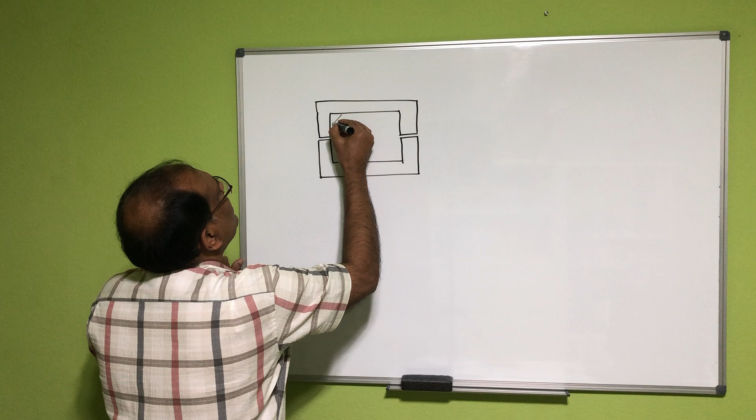That's the direct shear test box. Sometimes it's a square or cubical shape, and sometimes it's also cylindrical shape, so you have to look at what kind of shear box you're dealing with when solving the problem. We usually fill the box with soil. Now we keep either the top or bottom fixed, and then try to pull that one with a force S.

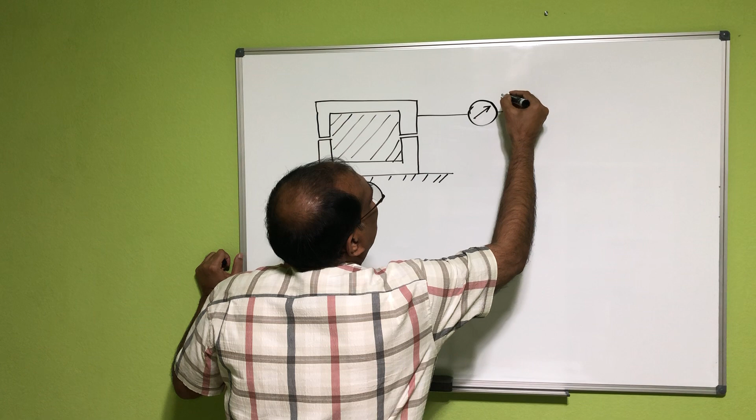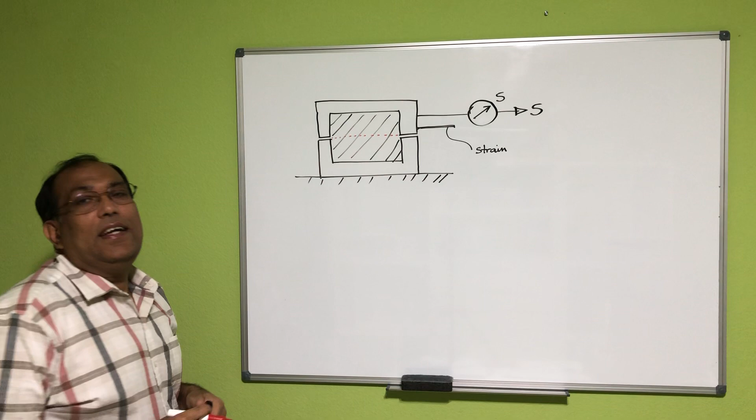When we apply that force, we can either increase the stress, or sometimes apply constant strain and measure what stress results from that strain. We have a box from which we can find the shear force, and there is an LVDT that measures the strain. When the box tries to slide, there has to be a crack so the top part can slide, creating shear failure within the material. That's basically your shear strength.

Before that, I forgot to mention you have to add some normal force here. Let's say this is sigma. Sometimes we call the load P, and if the area of the box is A, then sigma is P divided by A. As you push harder, it becomes more difficult to pull on this side, right? You already did this for your lab.

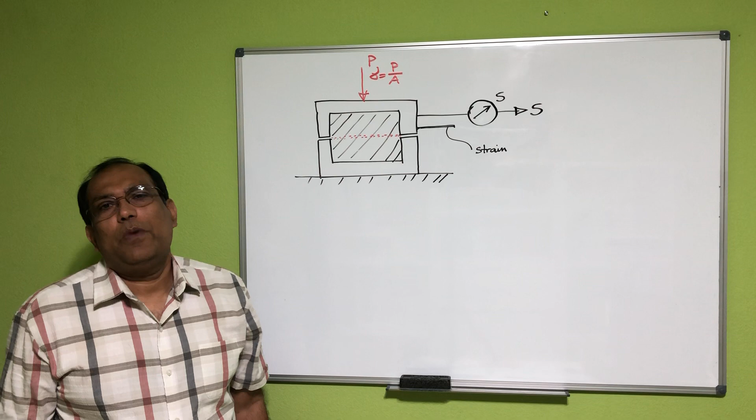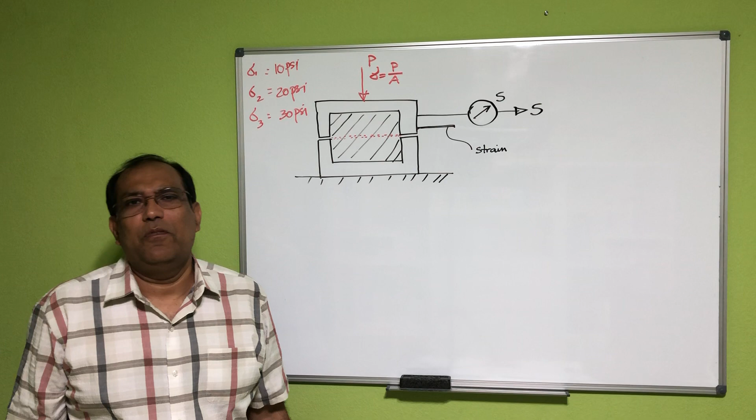Now let's see some problems. For this test we usually change sigma 1, sigma 2, and sigma 3. Let's say 10 psi for sigma 1, 20 psi for sigma 2, and 30 psi for sigma 3. For each normal stress we try to find the stress-strain diagram. If you draw the curve with strain and stress axes, you'll see curves for sigma 1, sigma 2, and sigma 3.

This is for sigma 1, this for sigma 2, and this for sigma 3. For each case we have to see what is the maximum stress the soil can take - that's the strength of the soil. So let's say this is tau 1, this is tau 2, and this is tau 3.

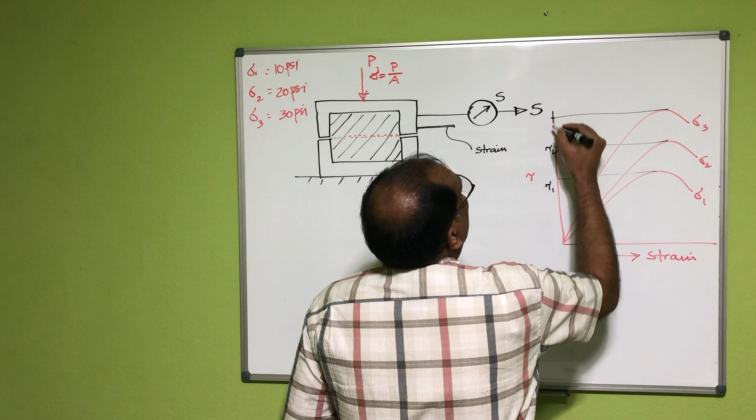Then we draw another curve, with sigma on one axis and tau on the other. If you plot the three points - sigma 1, and so on for all three points - for most cases, like sand and normally consolidated clay, C is usually 0, meaning the curve passes through the origin. Now this angle we call phi, the internal friction angle for the soil.

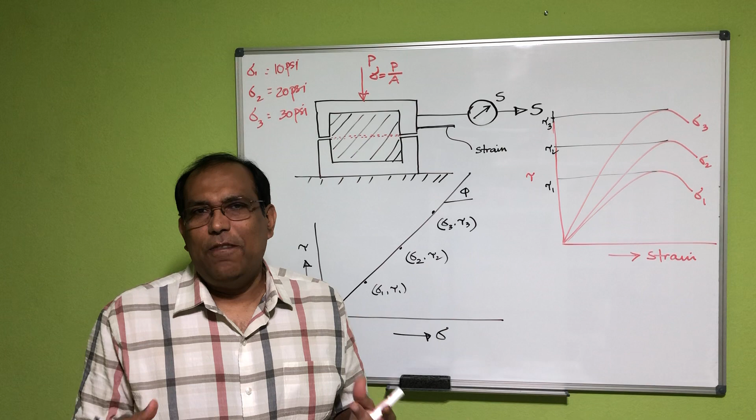That's what we can determine from our direct shear test. The problem with the direct shear test is we cannot mimic the side pressure or confining pressure, and also we cannot mimic the drainage situation, whether the soil drains fast or slow. There's no mechanism for that. That's why we also do the Tri-Axial test. The problem with the Tri-Axial test is it's a little more complicated - very accurate, but more complicated and takes more time than the direct shear test.

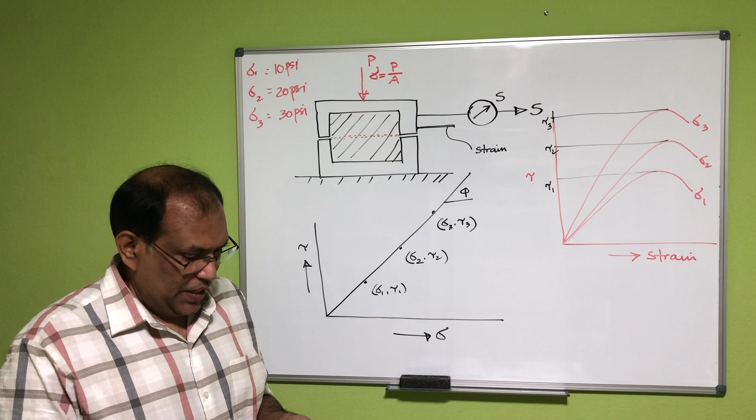Anyway, I'll talk about the Tri-Axial test later on, but let's do some problems from the direct shear test here. If you take a look at your worksheet, we can do some problems from there.

So let's start from number 2. Actually, number 1 is a tri-axial test problem, so we'll solve that one later on. Let's start with direct shear test problem number 2.

A direct shear test was conducted on a dry sand specimen. As soon as they say it's sand or normally consolidated soil, this means your C is 0, okay? This is kind of implied there. They will not tell you that C is 0, but as soon as they say this is sand or normally consolidated clay, they are indirectly telling you that the cohesion C is 0.

The shear stress at failure was measured 20 psi when the applied normal stress is 30 psi. The angle of internal friction of the sand would be easy to find, since you already know the relationship that tau is equal to sigma tan phi plus C. But this is dry sand, so your C equal to 0.

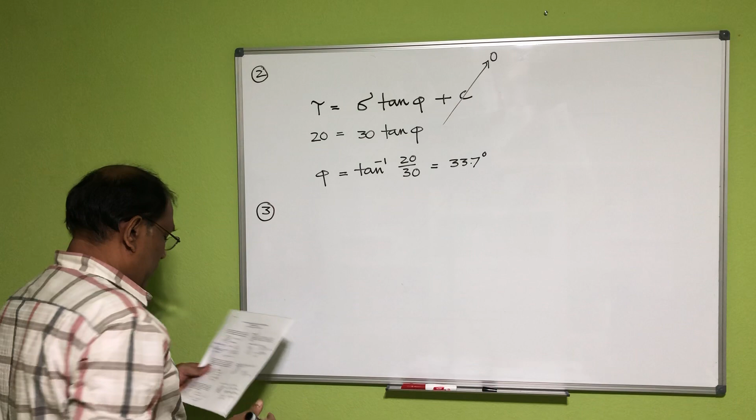This is problem number 2. Problem number 3: the direct shear test was conducted on a 2 by 2 by 1.2 inch height specimen, dry sand specimen. Again, when it's saying dry sand, it means your C equal to 0.

If the angle of friction of the sand is 24 degrees, the estimated shear force required to failure when the applied normal stress is 16 psi—so actually your C equal to 0 and sigma equal to 16.

So first of all, you just find out your tau here. Tau is equal to sigma tan phi, and phi is 24 degrees. So this one is 16 tan 24 degrees, which is basically 7.124 psi.

Now you have to multiply with the area if you want to find out the shear force, right? So shear force here is equal to tau multiplied by the area—the area of contact between these two surfaces, which is actually 2 into 2, 4 square inch.

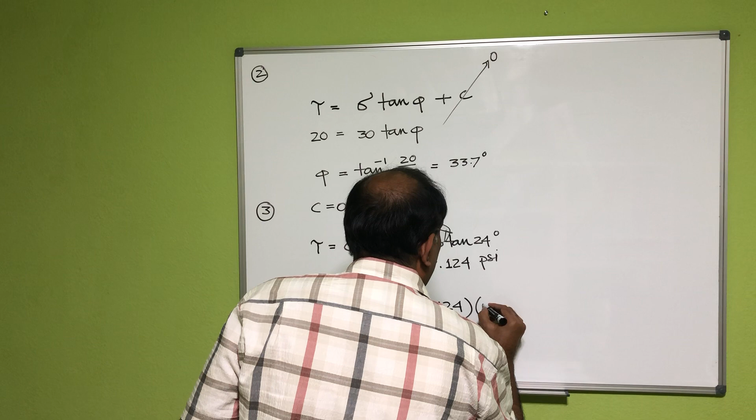So this one would be 7.124 multiplied by 2 into 2, that's 28.5 pounds. Okay, so the answer is C here.

And also, if you take a look in your class notes, you will see there are a couple of examples from the direct shear test there. Take a look there, this one is very, very important too. Anyway, now we are done with the direct shear test.

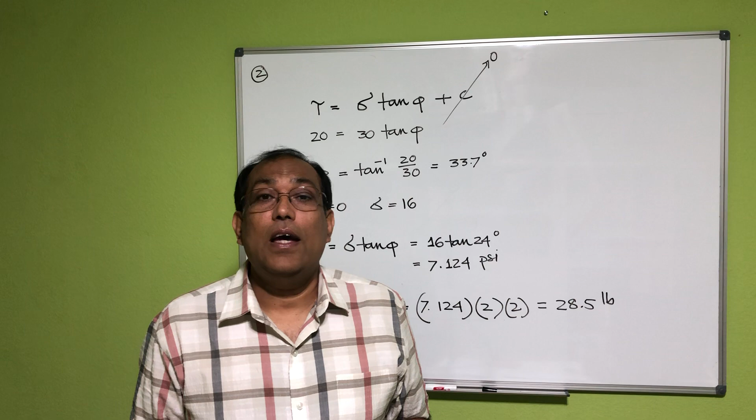We'll be talking about the tri-axial test. Now, we don't have any lab for tri-axial test for undergraduate students. Usually we have a lab for tri-axial test for advanced soil mechanics class, which is a graduate class. But I'll talk about this tri-axial test a little bit so that you can understand what it is and what it means.

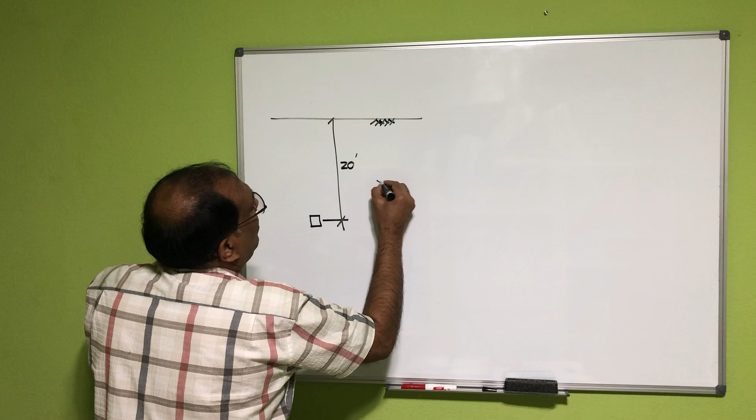Let's say this is your original grade here, and I'm taking a soil specimen from somewhere here, which is 20 feet below the soil surface, okay? And the gamma of that soil is 110 pounds per cubic foot.

Now if you see in this soil element, what is the vertical stress here? That would be sigma vertical, which is gamma H, which is 110 into 20 PSF.

Now, what is the horizontal pressure here? You can remember from your fluid mechanics that for any kind of fluid, the horizontal force is equal to the vertical force, because for liquid, the pressure works similarly in every direction. For soil, it's not true, okay? But what's the horizontal pressure here? That's basically not covered in this course, it will be covered in the next course.

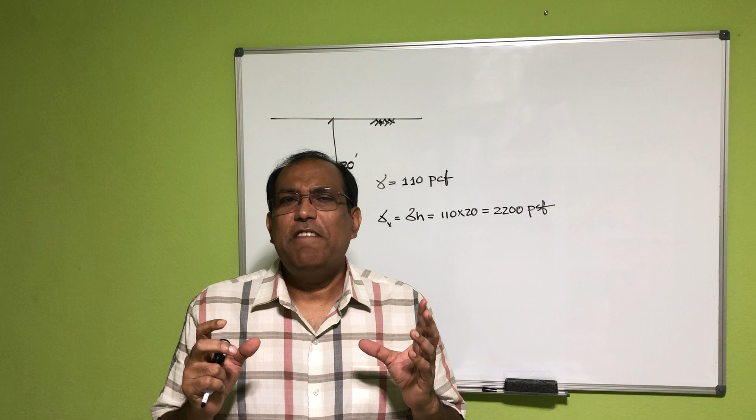But usually if the phi of the soil is 30 degrees, then your horizontal pressure is half of your vertical stress. So if I take that soil element here, you can see this is 2.2 KSF, and let's say this is 1.1 KSF—so that's the loading situation of the soil element.

Now you can see here that at the beginning we don't apply any shear force at the top or side wall of the soil.

Here you can see there is no shear force here, because these are principal planes, and on principal planes your shear should be 0. But when we apply that vertical force, it will create shear force at different angles. If you check the shear force there, you'll see it's not 0 in that particular plane. So it creates shear force automatically at different angles, and if this shear force is higher than the shear strength of the soil, the soil will slide at that particular angle.

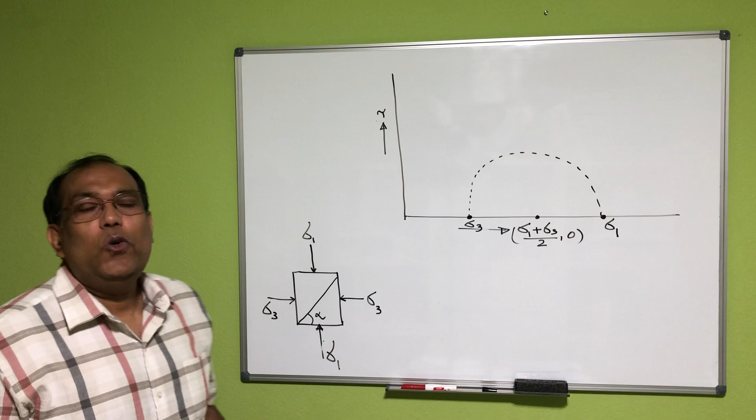Now let's say this is a sand, so the cohesion is 0. If you draw the Mohr circle here, this is your sigma 1 and this is your sigma 3. That's the Mohr circle. Now you can see, from Mohr-Coulomb's theory, that the soil will fail at a particular combination of normal stress and shear stress, and the failure envelope looks like this line: tau equals sigma tan phi plus c, but c here is 0, so I'm just putting that in.

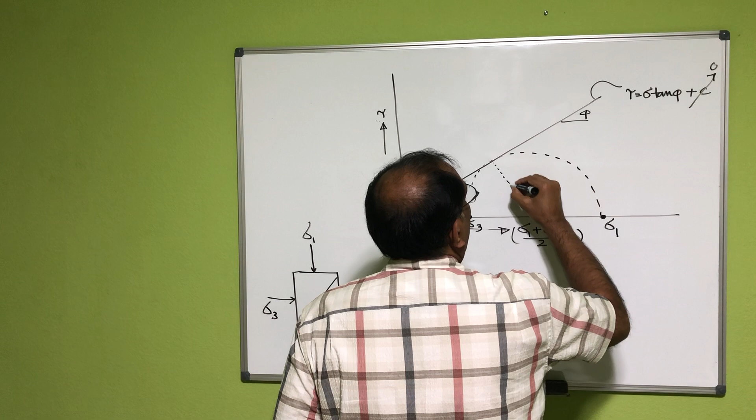Now if you look at your book, this figure comes from there, and from that figure they have 2-3 different relationships or formulas that you might have to use to solve these problems. That's the failure point here, which we usually call sigma f, tau f. Now the important thing is: what is that angle making with the positive x-axis?

If you know that theta, you can find out what the shear stress and normal stress would be on that failure plane, because you already did this in chapter 10, the stress transformation cases. Now let's say this one is twice theta, and this one is 90 degrees. Let's say this is alpha and this is phi. So you can see this is 180 degrees, so I can say 2 theta plus alpha equals 180 degrees, which equals alpha plus 90 plus phi.

So in this equation, alpha cancels, so your theta would be 45 plus phi by 2. So this angle here, theta, is equal to 45 plus phi by 2.

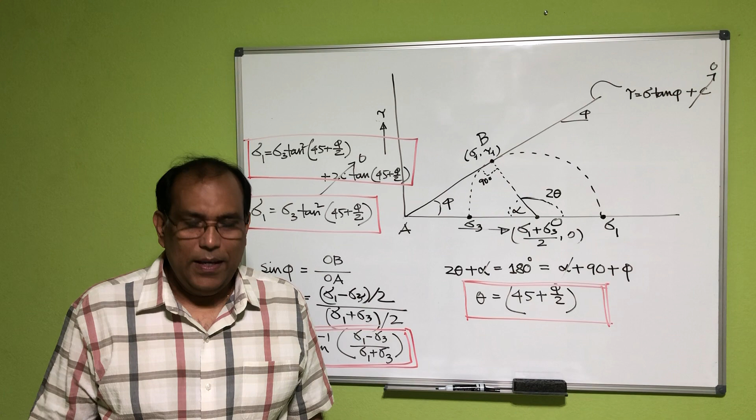Now let's talk about, hey, why we are doing so many different Tri-Axial tests, right? CD test, CU test, and UU test. Why? What does it mean actually, right? Now let me show that one to you a little bit.

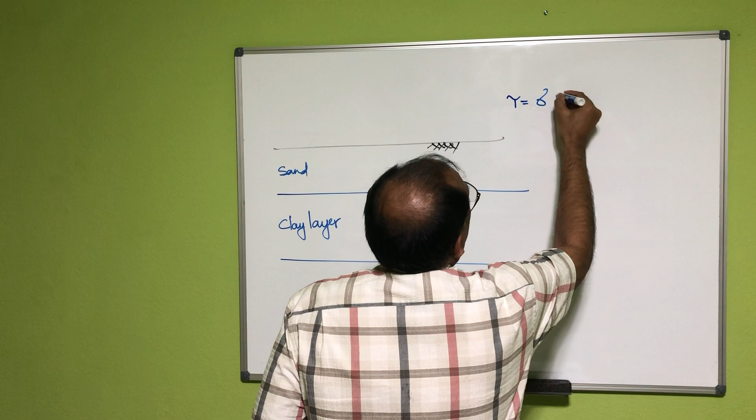Let's say this is sand and this is a clay layer. Now I'm just trying to find out, hey, what would be the tau here in the middle of that layer. But you see that your shear strength for a c-phi soil, meaning either sandy or a mixture of sand and clay, is a function, right? It's not a number, it's a function. And this function is your tau is equal to sigma tan phi plus C, okay?

Now, let's say for this particular layer, not clay layer, let's say it's kind of like a mixture of sand and clay, yeah, we can just say low plasticity clay. Now if you want to find out the tau, you have to say, hey, what is your sigma here, right? But before sigma, this is your sigma basically here, I'm gonna make a structure here.

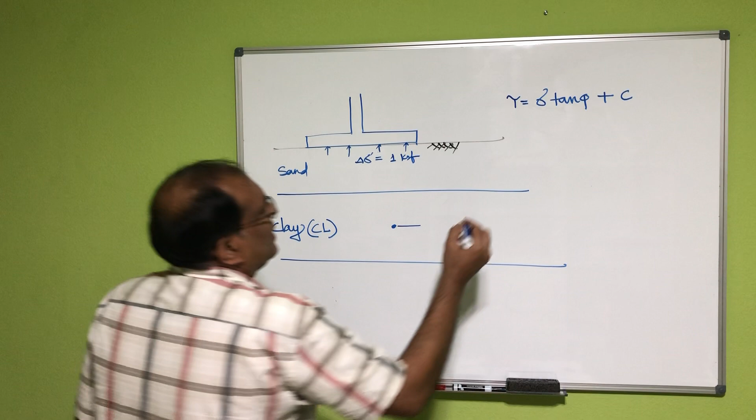That's actually from there. This one, let's say, is del sigma prime, which is, let's say, 1 KSF. Okay, and let's say this one is 10 feet, this is 16 feet. Here, the soil gamma is let's say 120 PCF, phi equal to 34 degree, and here you have your water level here, and let's say the gamma sat here equal to 115. And C is equal to 200 PSF.

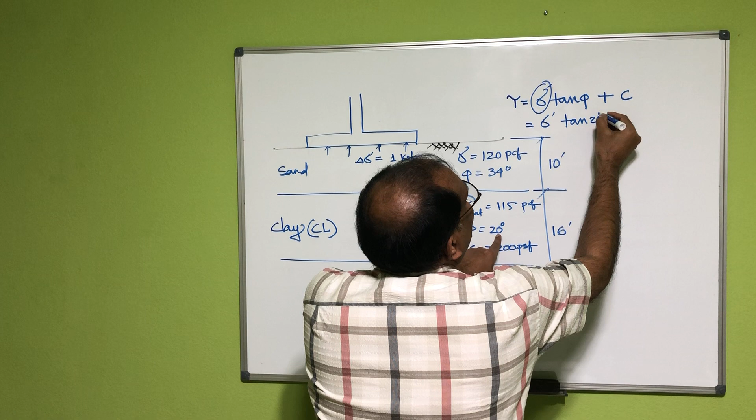Okay, now what would be the strength of that soil at point C? Now it's not that difficult here. You can just plug all those values here. Only important thing is here, this one is basically the effective stress. All other stresses remain, all other things are fixed here, because you can see this is sigma prime, tan 20 degrees plus actually 0.2.

Now, what is your effective stress at this point? You can see that the overburden pressure here is 120 into 10 plus 115 minus 62.4 into 8. 8 is the midpoint, that's why I'm just keeping that one. That's your overburden pressure. And then you can see that this much force is coming from the new force, from the new structure.

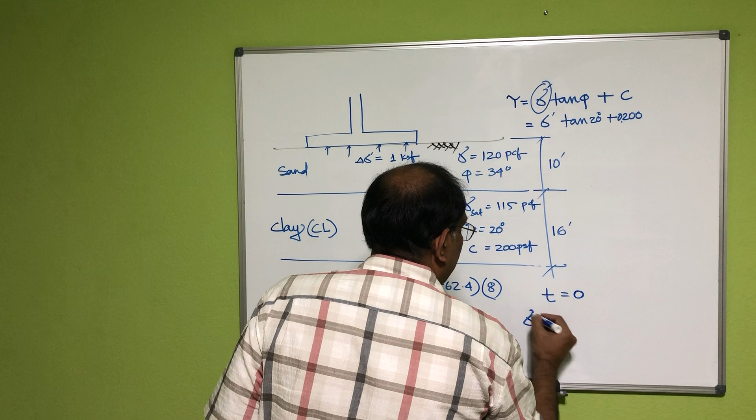Now what will happen, as soon as you apply that load, who will take all this load in this layer? Because this is clay soil, it has to go through primary consolidation settlement. So at the beginning, you will see that all the load is taken by the water, right? So at time t equal to 0, you see your sigma prime would be actually this overburden pressure, and at the beginning del sigma, this one is actually 0, right? Now you can see when the consolidation occurs, then basically this one would be sigma prime plus.

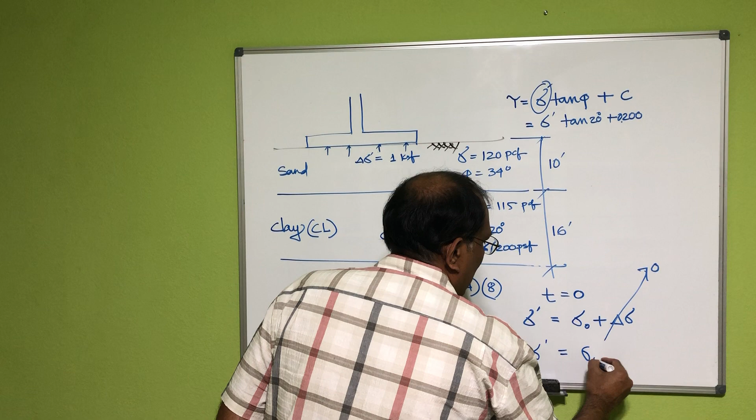So you see that basically your effective stress is changing with time, and this time is a function of what kind of soil we are talking about. This is applicable only for clay soil, because for sandy soil the water will drain very quickly. You can calculate this based on this equation here.

But let's say this soil takes 15 years for full consolidation. I'm making that structure in 2 years. So by the end of construction, 2 years, you will see only 5 to 10% consolidation occurred, meaning only 5 to 10% of the total load applied is going to the effective stress.

So if your effective stress is low, your shear strength is low. If your effective stress is high, your shear strength is high. So basically with time your shear strength is changing. That's why drainage is very, very important, how fast this one is draining.

Based on that, we try the Tri-Axial test with 3 different scenarios. First, the soil is draining fast enough that if the structure takes 3 years construction, by that time the overall consolidation settlement will have occurred. That's case 1, we call that CD test, consolidated drained, meaning all the time the pore water pressure will be 0 because construction is slow enough that water can drain out easily.

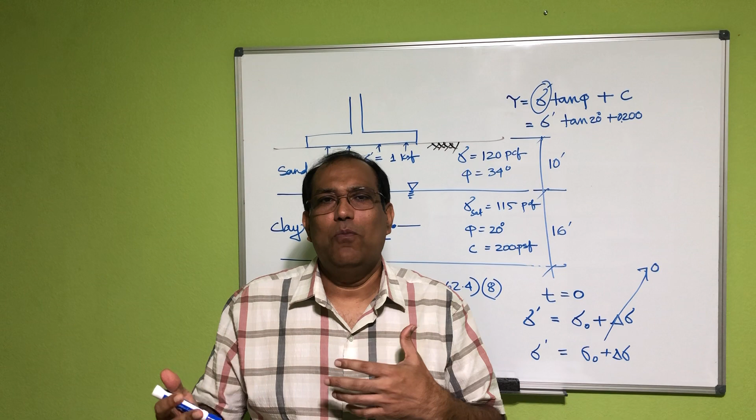We usually apply confining pressure, then allow the water to get out, and when we apply the vertical or shear force, we close the valve so water cannot drain at that time. Based on that you get 3 different Mohr circles, because for completely undrained situation every pressure you apply is taken by the water since water is not draining. So you cannot change the effective stress on the soil, and your strength remains the same.

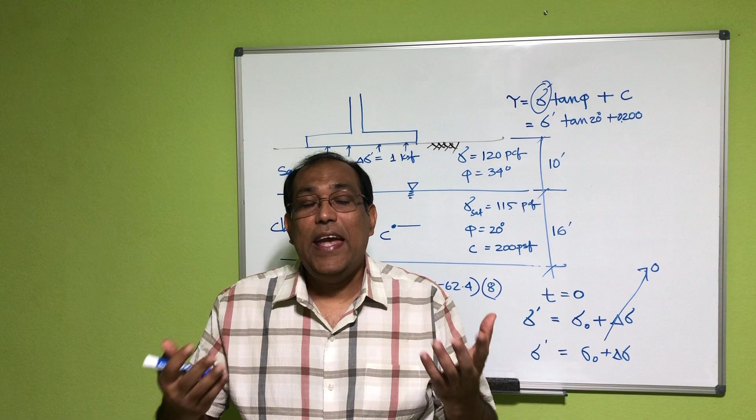So let's now go back. We'll talk about each of the problems and try to see how this plays out. Let's start from number 1 here.

Problem number 1 says for a normally consolidated clay or sand, it means your C equal to 0. And then they're saying phi is equal to 26 degrees, phi prime.

In a CD test, the specimen failed at a deviator stress of 23 psi. Before doing that, let me explain a little bit about what deviator stress is and what all these stresses are. For your Tri-Axial test, let's say this is your soil specimen, cylindrical. Usually we always take a cylindrical soil specimen.

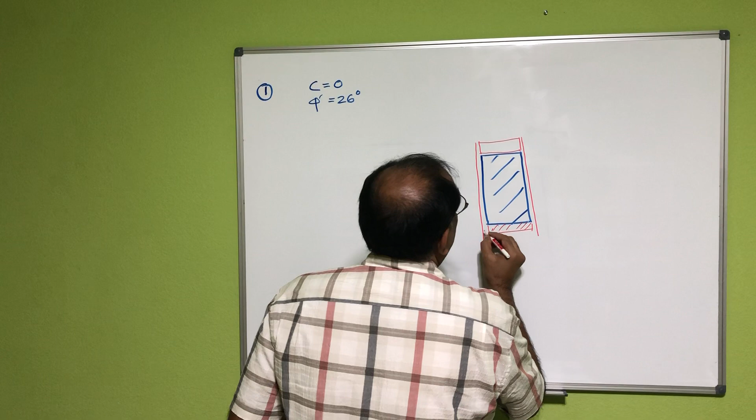That's a porous stone here. And then we keep the whole thing inside a tube, a rubber membrane, and lock it here and here with O-rings, so they are inside the membrane. Now the whole thing we put inside a water chamber.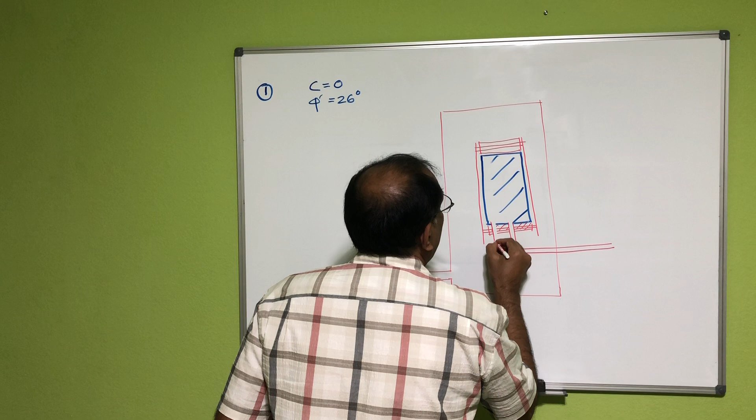Now from here you have two lines: one just to drain the soil from there, and one more line which measures the pore water pressure. Now first, what we do is just fill that chamber with water.

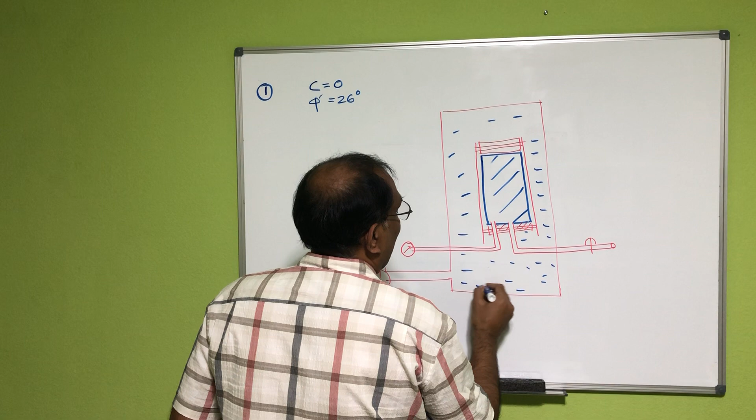Now let's say this is closed, the valve is closed, so no drain. Now let's say I'm changing my pressure here from a control board, I have a knob there, I can change it, let's say I want to apply 10 psi load. So the water pressure, sigma 3, let's say 10 psi.

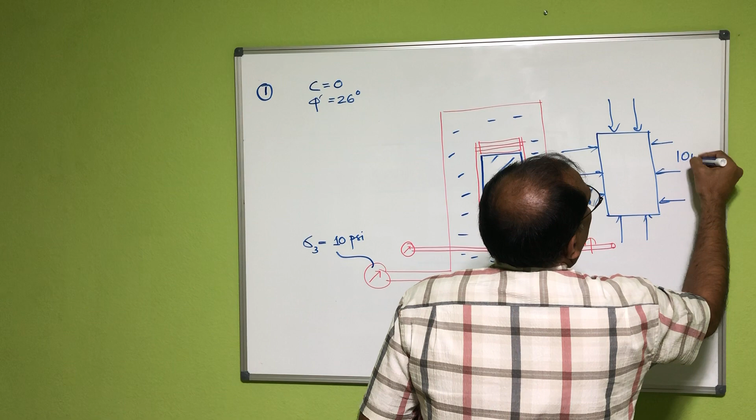So you can see the whole thing here will be under 10 psi pressure. If I show that one here, every way I have 10 psi pressure. So what happens when we apply that? It tries to compress the soil from every side, the soil will try to consolidate.

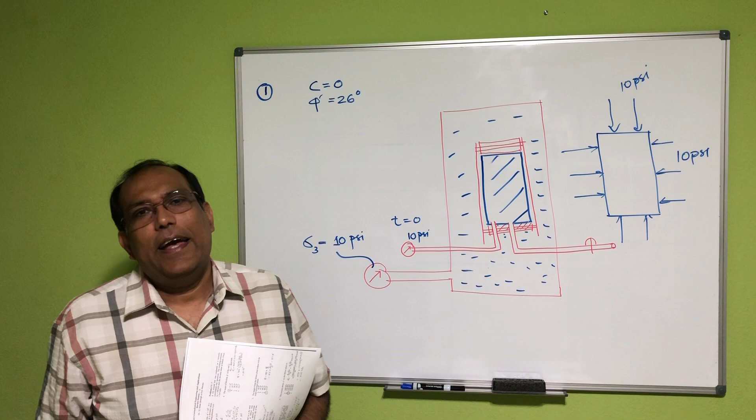Some of the water inside the clay soil will try to get out. So here you can measure, if I apply 10 psi at the beginning, the pore water pressure would be 10 psi at time t equal to 0. Then you open that valve, the water will try to get out, and this pressure will go down, down, down. At a certain time, this excess pore water pressure will be 0, meaning the soil has already consolidated. As soon as consolidation occurs, then we apply the vertical load here, very slowly.

And let's say this one we call the deviator stress. When this one fails, we measure that one. We call that one deviator stress at failure.

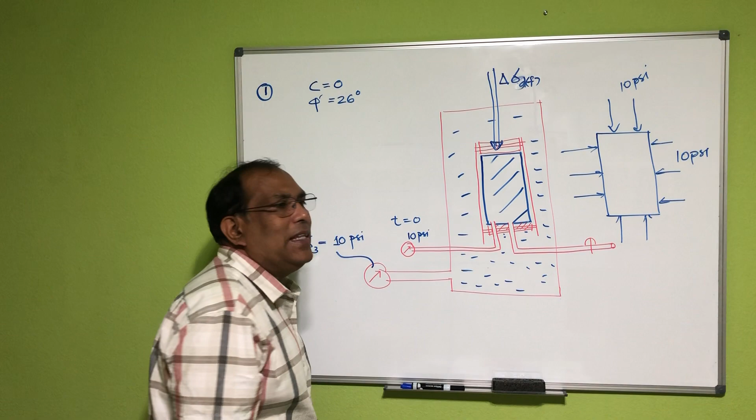Now there are two situations. First, when you are applying that confining stress, this one is open. If this is open, and when you are applying that shear, this one is also open, meaning the drainage is occurring all the time, then we call that one CD test - Consolidated Drained test. You are allowing consolidation, and then you are also allowing drainage when you apply that shear.

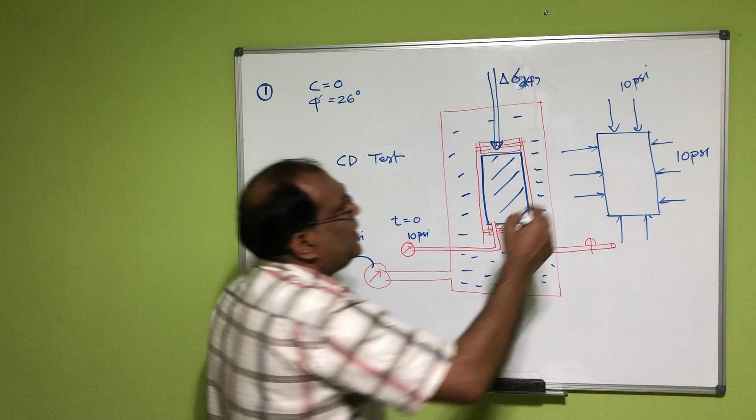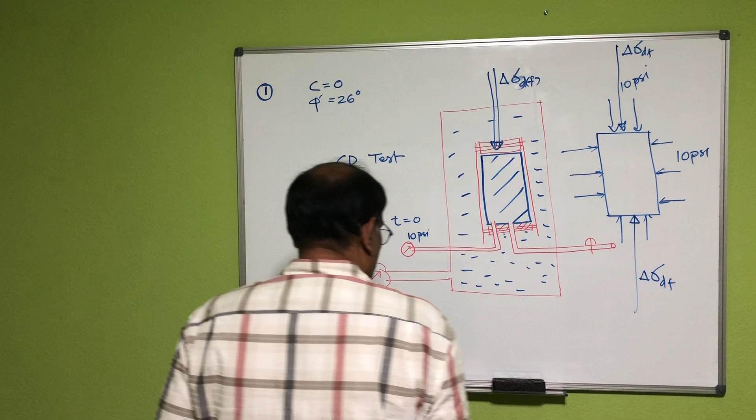Now if you see here, when you are applying this one, you are applying additional force. This is your deviator stress. So if I draw that one here again, this one is your sigma 3, all around pressure, and this one is your sigma 1, which is basically sigma 3 plus your deviator stress. So deviator stress, delta sigma df, that's basically sigma 1 minus sigma 3. That's your deviator stress.

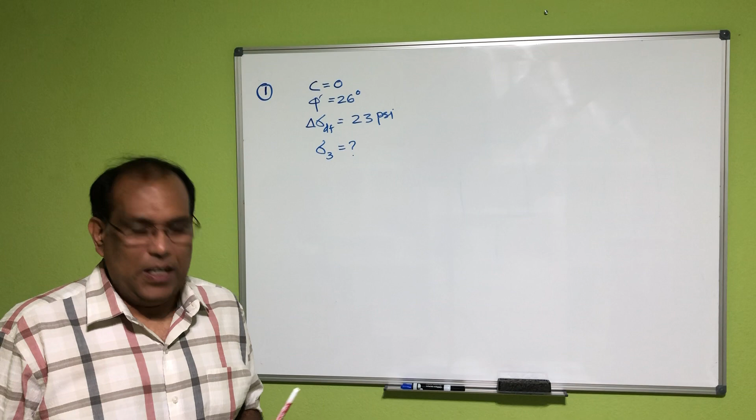Now let's go back to this problem here. This one is saying that the specimen failed at a deviator stress of 23 psi. They are asking what is the confining pressure, sigma 3. Sometimes we also call that one all around pressure, confining stress, confining pressure, or all around stress.

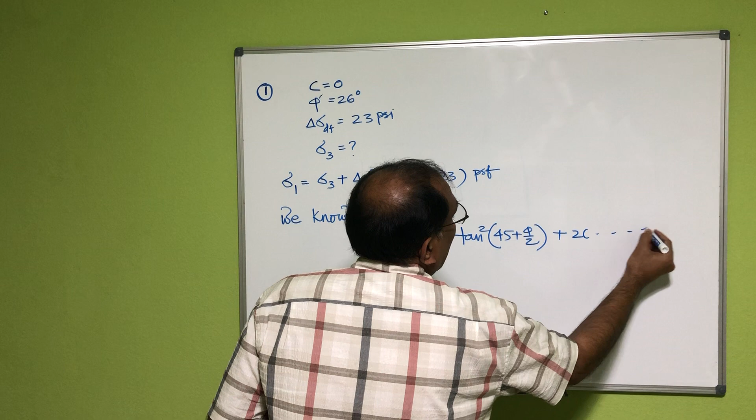Now you can see here, your sigma 1 is basically sigma 3 plus deviator stress. We know sigma 1 is equal to sigma 3 tan square of 45 plus phi by 2, plus 2C, but this one is 0, so I'm not writing that one here. So you can just say sigma 3 plus 23 is equal to sigma 3 tan square 45 plus phi by 2. If you solve that one, you get your sigma 3 is equal to 14.7 psi.

Now let's move forward. This is actually problem number 1. Problem number 4 to 7 are actually the same thing here, so I'll just say 4 to 7.

This one is saying that a CD tri-axial test was conducted on a normally consolidated clay specimen. The confining pressure sigma 3 is 300 kPa and the deviator stress at failure is actually 350 kPa. So what's the angle of friction of the soil? So you can see here, first of all, number 4, that's a CD test conducted on a normally consolidated clay specimen. As soon as this one is saying normally consolidated clay, this means your C equal to 0, right?

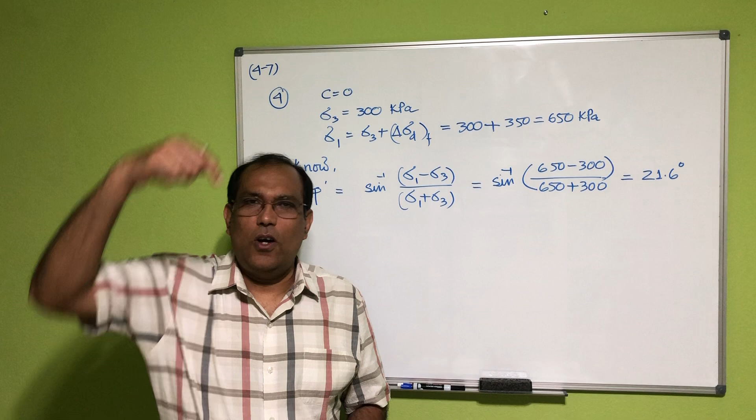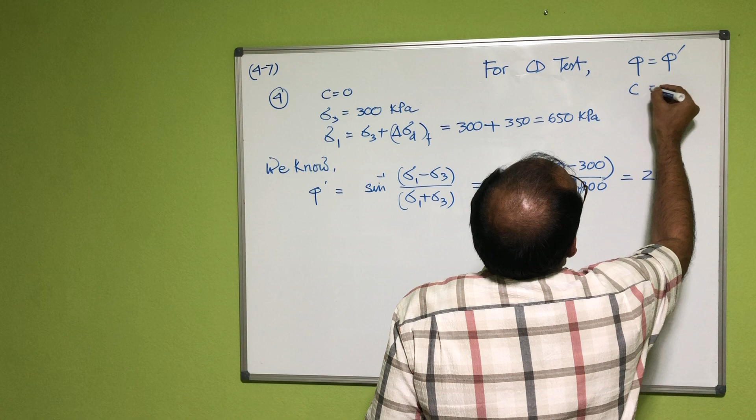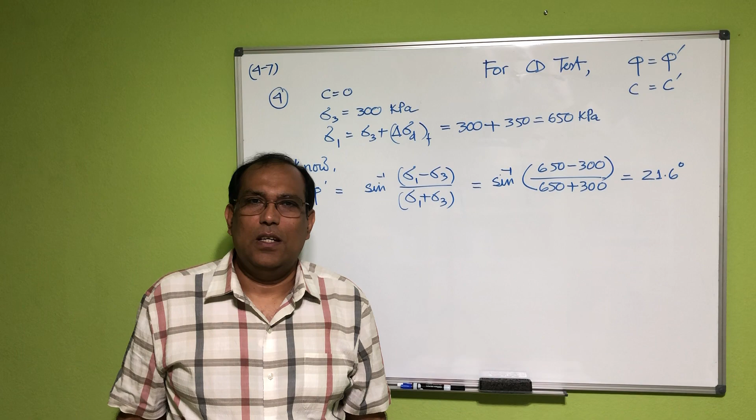One thing to try to remember for CD test, your valve is open all the time, meaning your pore water pressure is always zero. And you have to apply the load, either confining stress or the vertical force, slowly in your CD test so that all the time the pore water pressure will be zero. So for CD test, your phi is actually your phi prime, and because your pore water pressure is zero, effective stress equal to total stress minus pore water pressure. So when pore water pressure is zero, then basically your effective stress is always equal to your total stress. So the strength parameters phi and C would be equal for effective stress and total stress cases.

Now let's move forward. They say the angle that the failure plane makes. So if I draw that one here, so you got your sigma 1 and sigma 3. This one was 300 kPa and this one is 650 kPa. Now this one is actually asking what angle this specimen is going to fail at, right? So that's your angle theta.

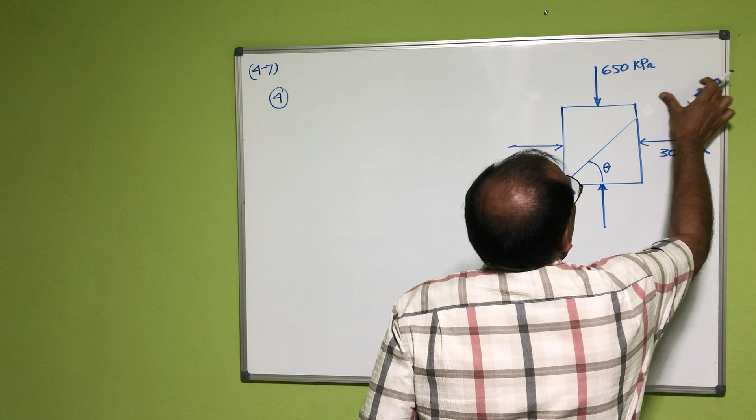But we know, number 5, theta is equal to 45 plus phi by 2. So 45, in the previous problem number 4, we already got the value of phi, which is 21.6. So this one is 55.8 degrees. Now they're also asking, hey, the normal stress sigma on the failure plane in that particular plane. So you just go back to chapter 10 now.

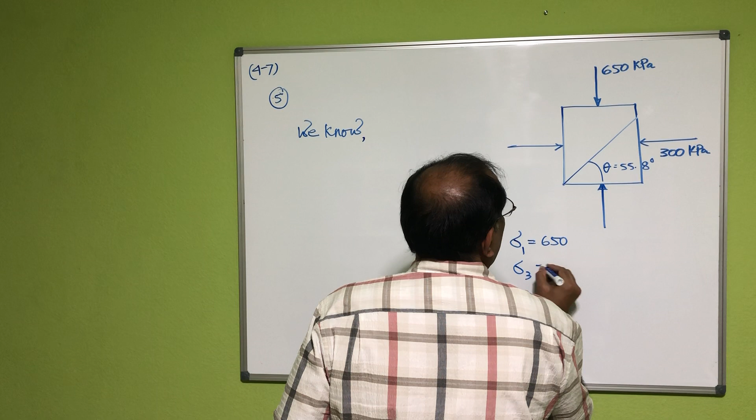So you can see here sigma 1 is basically 650, sigma 3 equal to 300, your angle theta measured, positive x-axis counterclockwise is positive, so this one is 55.8 degrees.

Okay, what else? Tau xy, that's actually 0 because I don't see any tau here, right? So we know from chapter 10 that sigma n at any particular angle is equal to sigma 1 plus sigma 3 divided by 2, plus sigma 1 minus sigma 3 divided by 2, cosine twice theta, plus tau xy sine twice theta, right? But tau xy equal to 0, so I don't need that part here.

So you just plug those values here and find out what would be your sigma n. So 650 plus 300 divided by 2, plus 650 minus 300 divided by 2, cosine 2 into 55.8 degrees. So you got 410 kPa.

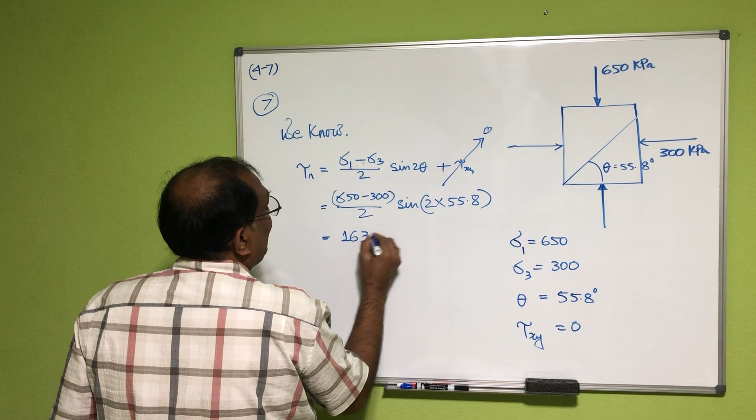Okay, so that's basically the same thing like that I showed at the beginning. Okay, anyway, now let's move forward.

We are going to show 2 problems from CU test. Okay, so let me explain CU test a little bit, so that you can understand that one easily.

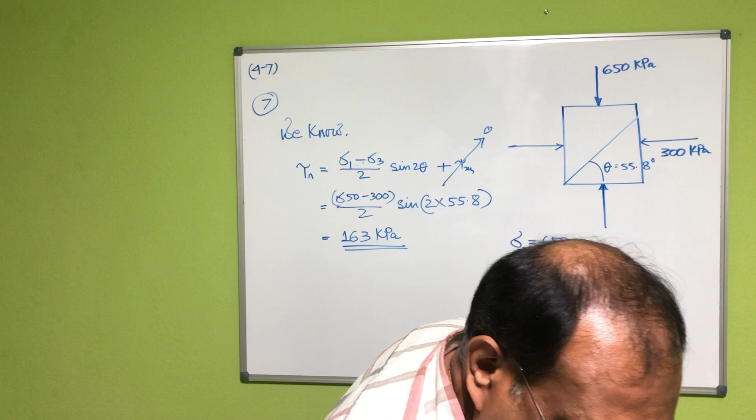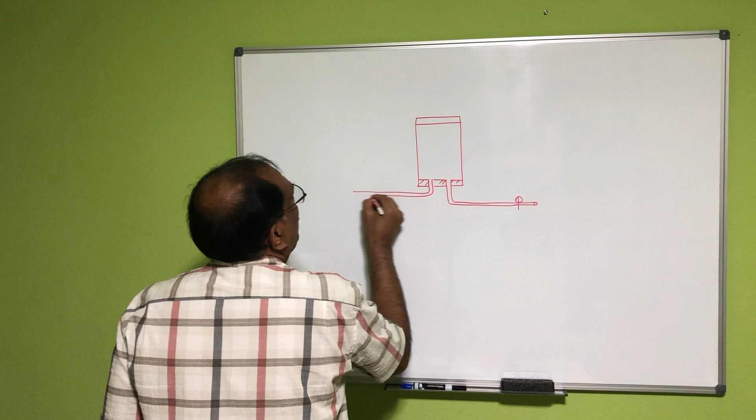So as I showed you earlier, let's say this is my soil specimen here. There is a line here for drainage. If you open that valve, then it will drain. If you close that valve, it can't drain. Okay, so now you can see there is also a transducer that can measure the pore water pressure.

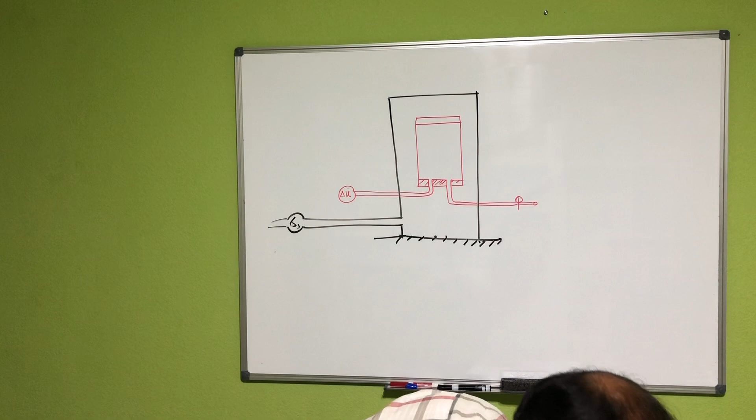Pore water pressure. Now the whole thing is inside a water chamber, right? So here you can just apply water pressure here. Now let's say I apply a confining stress first here.

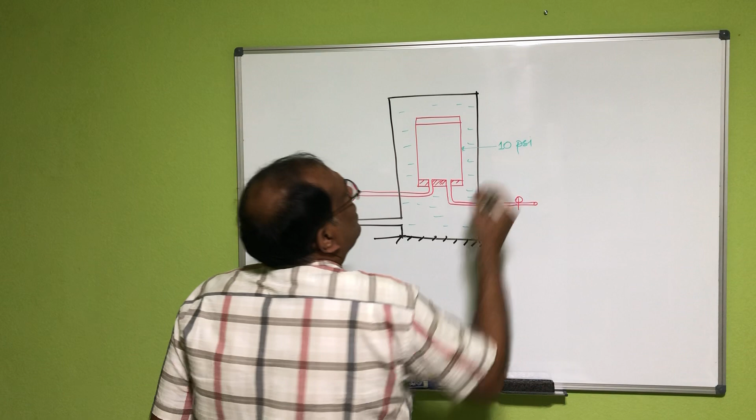Fill that one with water, and all around pressure, let's say here is 10 psi, okay? And once you apply that 10 psi, usually we don't apply 10 psi at a time. We usually apply 1 psi first, and then after 30 minutes or an hour, we'll change that one to 2 psi, so that I'm applying pressure and the soil is trying to shrink because you are trying to push that one all side, right? So some of the water has to drain out from there.

And you will see as soon as I apply 10 psi pressure, this one theoretically should be 10 psi here. But since the valve is open, during that consolidation time, we are applying that pressure so slowly that all the time the pore water pressure will be 0. This means during that time your effective stress is equal to your total stress, okay?

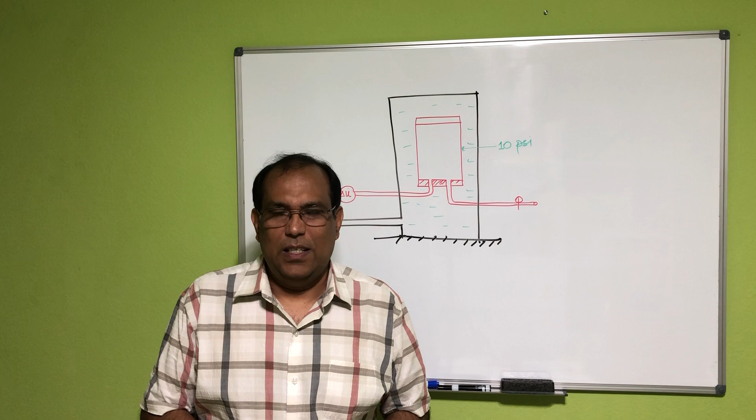Now, what about when I apply that shear? For CD test, this valve will be open when I apply that shear force here, okay, from outside, very slowly. So this one is your deviator stress, right? Sigma dF, that's actually P by A. P is the force, A is the area of that cylinder, okay? Now when you start applying this one, that time actually you close that valve, okay?

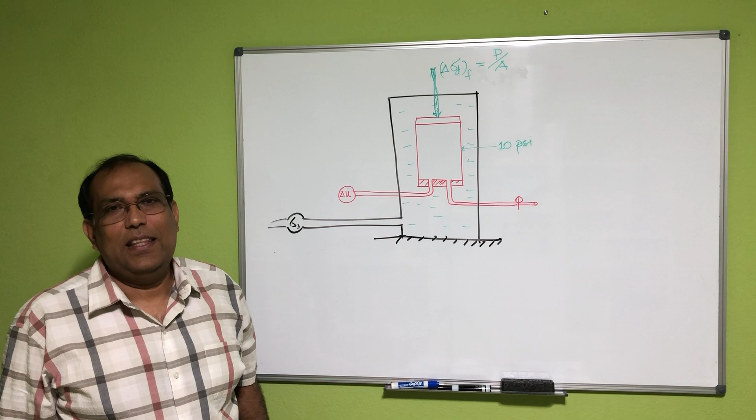So when this one is consolidating, that time this valve is open, so drainage allowed. When you are applying that shear force here, after consolidation, then basically this valve is closed. So what will happen when you are applying that load, you will see that this one will create some pore water pressure here. And when this one fails here, then basically you will record a pore water pressure at failure. Okay?

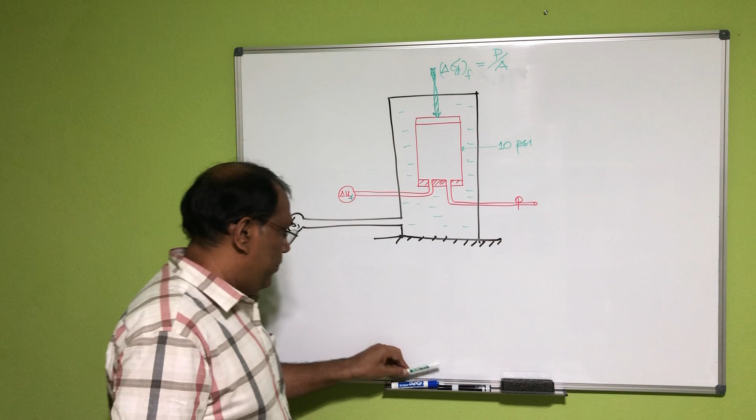Now let's get back to the Mohr circle for this one. For a normally consolidated or sandy soil, this one looks like this. So this is your, let's say, sigma 1. Now this is sigma 1 and this is sigma 3 in terms of total stress.

Now you also measured the pore water pressure at failure. So if you subtract that pore water pressure from sigma 3, then basically you get sigma 3 prime. So this is your pore water pressure that you measured at failure. Okay? Similarly, if you subtract that one from here, then basically you will get sigma 1 prime. So the distance between this one is basically here.

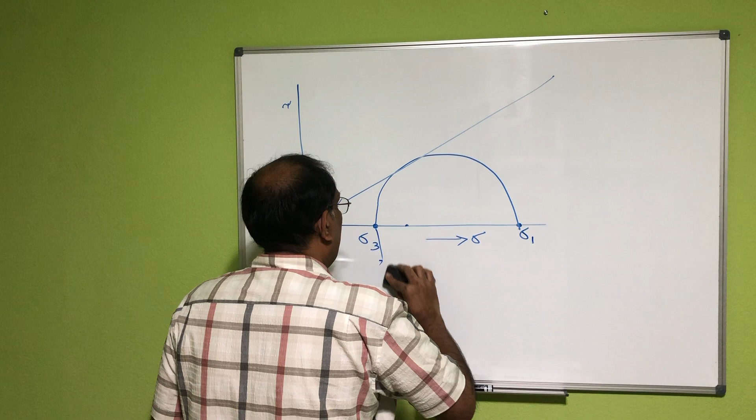No, actually I made a mistake here. That would be the other side, other way around, right? Because you are subtracting something from here. So that's basically your sigma 3 prime.

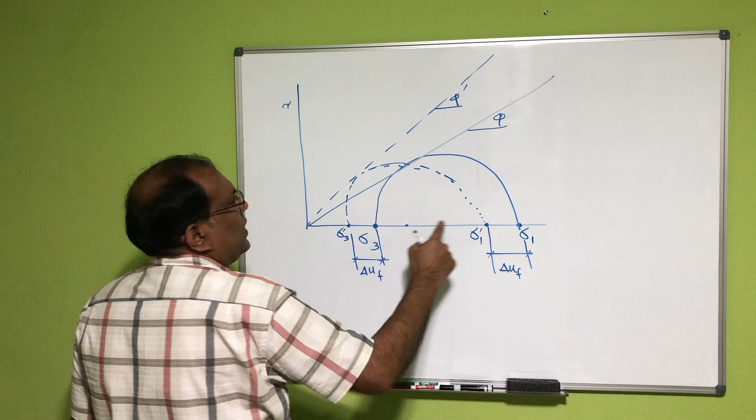Similarly, this one is here. So if you subtract your pore water pressure at failure, then basically you get the effective stress. Now from there you can just draw another circle here. So you can see this one in terms of effective stress, and this one is in terms of total stress. If you think separately, like this one and this one, then all the formula that you developed from this figure works for both of them. Now let's see how we can use this information to solve our problems.

So problem number 8 and 9, this one is saying the consolidated undrained Tri-Axial test on a normally consolidated clay. When we say normally consolidated clay, then C is basically 0. Actually in this book, for your course, most of the cases C equal to 0, because otherwise this one would be too complicated. So that's why most of the problems given in this book are actually C equal to 0. If your C is not 0, meaning if you have over consolidated clay and you do that test, then you have to do at least 2 tests to get your C values. So that's kind of complicated. That's why most probably they didn't include this type of problem, so I'm not going to include that one in your exam too.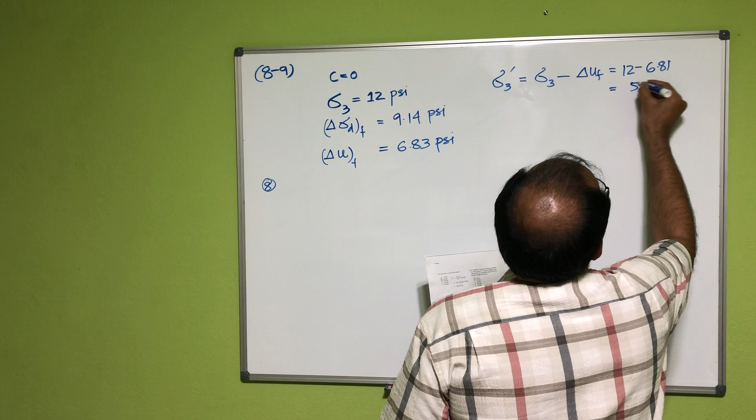Now number 8 is asking the drained friction angle. Drained friction angle means what is your phi prime. So you can see here that your sigma 3 prime would be sigma 3 minus your pore water pressure, which is 12 minus 6.81, giving 5.17 psi.

What is your sigma 1 here? Sigma 1 is basically sigma 3 plus deviator stress at failure. So that would be 12 plus 9.14, that's actually 21.14 psi.

So what would be your sigma 1 prime? That would be sigma 1 minus your pore water pressure, so that would be 21.14 minus 6.81, that's actually 14.31 psi.

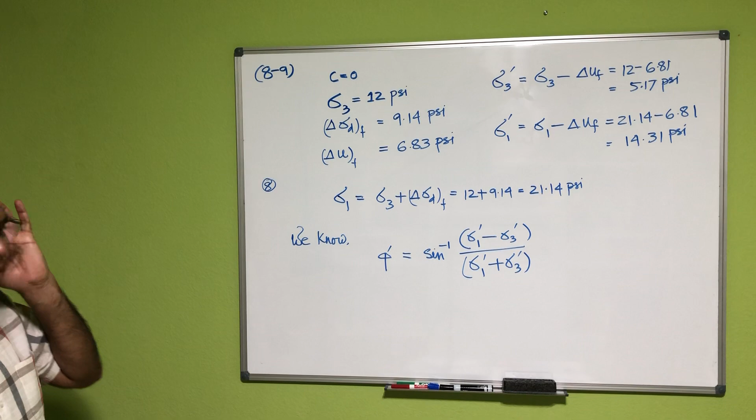Now we know that phi prime would be equal to sine inverse of sigma 1 prime minus sigma 3 prime, divided by sigma 1 prime plus sigma 3 prime. So when you are writing that equation, you have to be very careful, you are writing in terms of effective stress everything, right? So you are following that Mohr circle for effective stress. For total stress, this formula looks like phi is equal to sine inverse... but anyway, we are not going to use this one here.

They ask you to find out phi prime here. So you can see this one is sine inverse of 14.31 minus 5.17, divided by 14.31 plus 5.17, which is basically 28 degrees.

Actually, problem number 9 is saying that what would be the friction angle phi, in terms of total stress. So if you see this one here, only difference would be... so that's problem number 9.

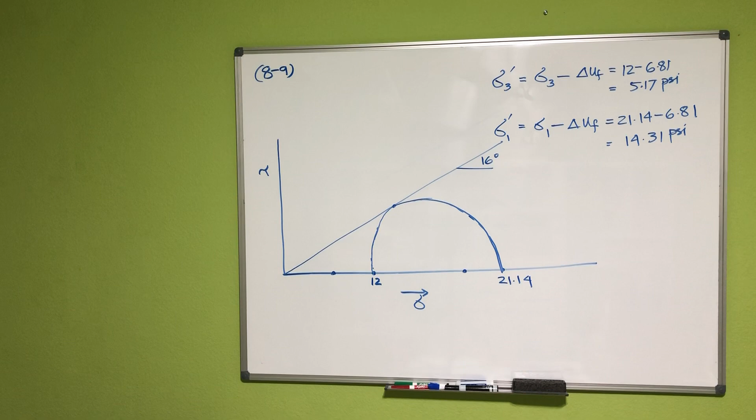So this angle, this is in terms of total stress, so this one is 16 degrees. In terms of effective stress, I subtract the pore water pressure here and pore water pressure here, and this one is 5.17, and this distance is basically your pore water pressure, which is 6.81.

Similarly, if I take 6.81 from here, so this is my sigma 1 prime, which is actually 14.31, and if you draw the Mohr circle for effective stress, this is your phi prime, which is actually 28 degrees. Phi prime, this is your sigma 3 prime, this is your sigma 1 prime. So this one is the red one. On the other hand, this one is in terms of your total stress here. Okay, anyway, let's move forward.

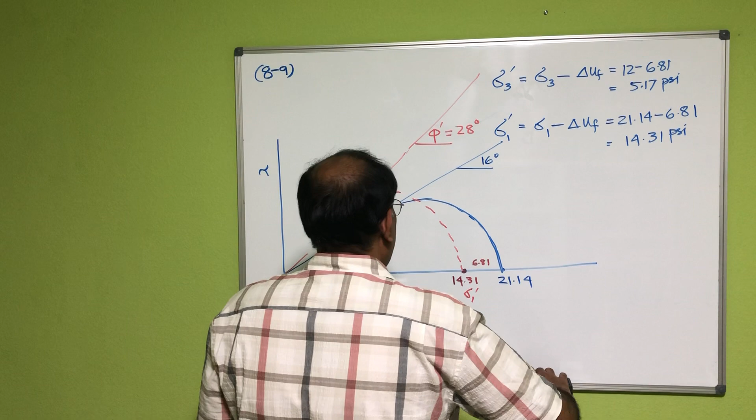Now we have to do your UU test. So what happens in the UU test? Your drainage is always closed.

When you apply this confining stress, basically your drain is closed. That means all the applicable confining stress will be taken by the water, because the drain is closed. So your effective stress, the stress in the soil, is not changing even though I am trying to push it.

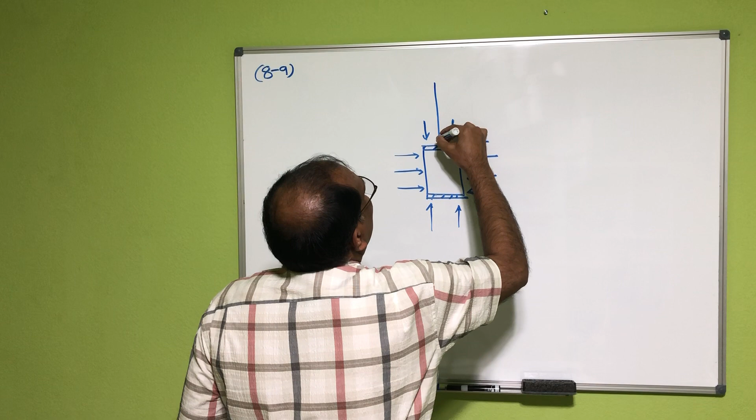Similarly, when I'm applying that vertical force, the drainage is completely closed, meaning all the load will be taken by the water, so actually the effective stress remains the same, it doesn't change.

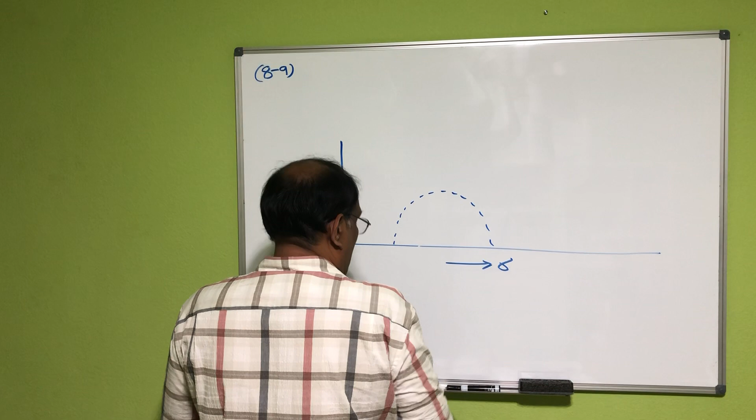Since effective stress doesn't change, it stays somewhere here, but you can change your total stress. You can apply more confining pressure or more vertical pressure, so your total stress changes. But all that load gets taken by the water, so effective stress is not changing. That's why for the UU test, we always express things in terms of total stress. So the total stress circle looks like this.

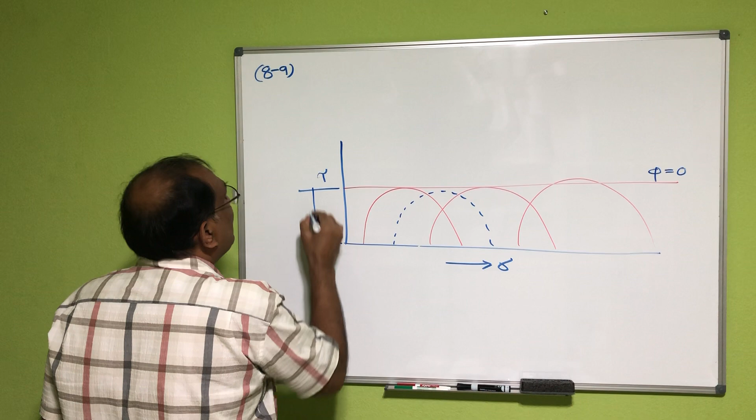If you change your sigma 1 and sigma 3, it goes like that. If you draw the line here, it becomes parallel to the x-axis, so phi equals 0. At that time, your strength C is basically the radius. This is your radius: sigma 1 minus sigma 3 divided by 2. That's basically your UU test.

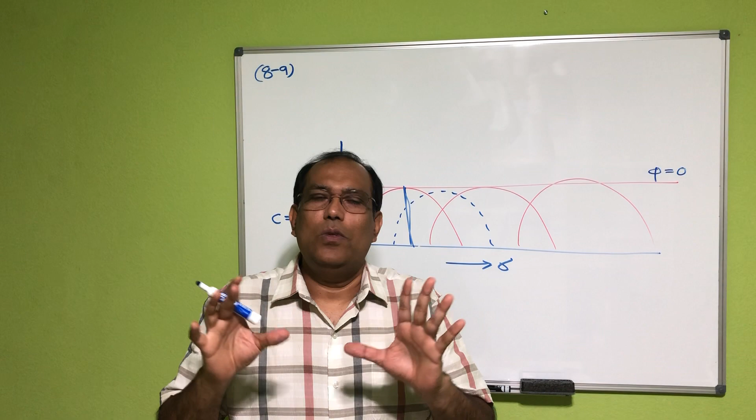So when you are preparing yourself, just think: I have 3 tests there, CD test, CU test, and UU test. For each of the tests, think about how the Mohr circle looks. Try to remember that inside you, it would help you a lot to solve these kinds of problems.

Now let's see the other problem here, the last problem. Number 10: an unconfined compression test was conducted on a clay specimen, 2-inch diameter and 4-inch height. So this is an unconfined test, basically a UU test.

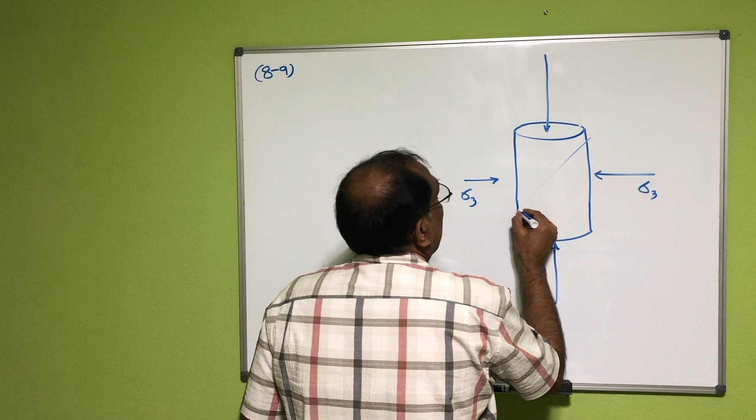Why is this called unconfined? Because sigma 3 is 0 here, it's not confined. Usually for a clay specimen, we just put it on top and apply load, and see when it fails. So sigma 3 is basically 0, that's why we call it unconfined. But unconfined compression test is a UU test.

Why is it a UU test? Because we apply that load fast enough so that the water cannot get out. This is a much faster test, that's why it's a UU test.

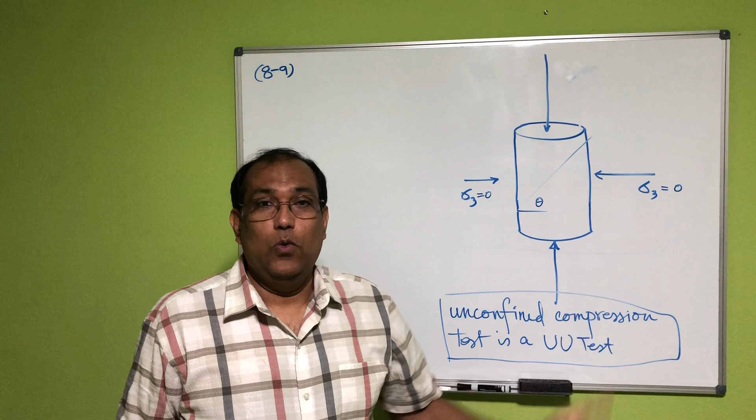Now they are saying an unconfined compression test was conducted on a clay specimen, 2-inch diameter and 4-inch height. If the specimen fails at a compressive force of 50.25 pounds, find the shear strength of the soil. So you are applying 50.25 pounds, and it fails. What was the stress at that time?

Sigma 1 is basically the deviator stress plus sigma 3, but sigma 3 is 0. So deviator stress was 50.25 divided by the area, and the area is pi r squared, with r equal to 1, giving 16 psi. So this causes 16 psi load, that's your sigma 1, and sigma 3 equals 0.

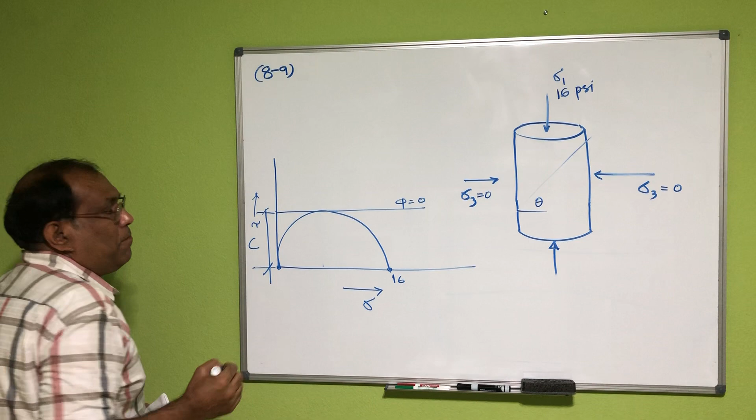So if I draw the Mohr circle here, remember sigma 3 is 0 and sigma 1 is 16. Since this is a UU test, phi has to be 0, and that's your C. But sometimes you also call that one CU, because it's coming from the confining stress, from your unconfined compression test.

You can see your C is nothing but half of the radius, half of the diameter, since it's the radius here. So what's the radius? That's actually 16 divided by 2.

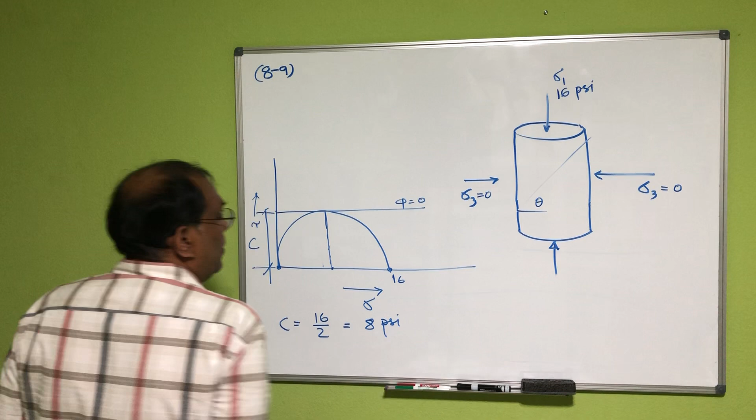So this is the diagram for the unconfined compression test, which is a very common test because it takes very small time to do. So that's about it for this chapter.